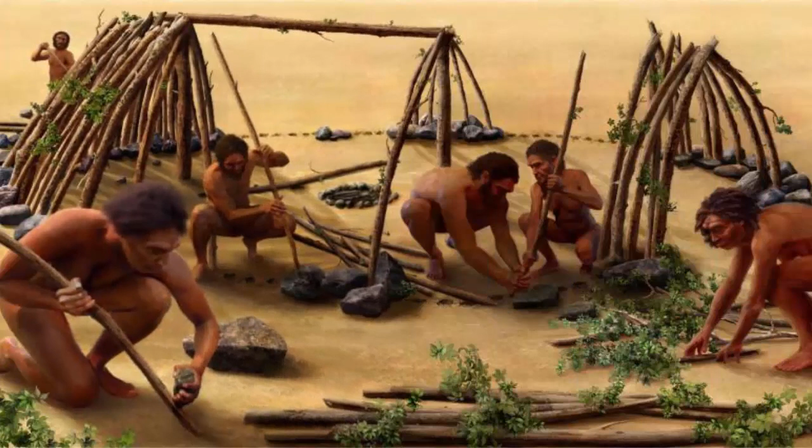Since their first attempts to improvise their shelter, humans started to change the face of this planet more and more rapidly, especially after every industrial revolution. First shelters made of branches, stone and animal skin combined with first indoor fires for heating and cooking evolved into today's high-tech buildings. Materials, first natural with minor adjustments, in time became more and more processed and artificial. That made constructions bigger, cheaper, and the time of their production decreased.

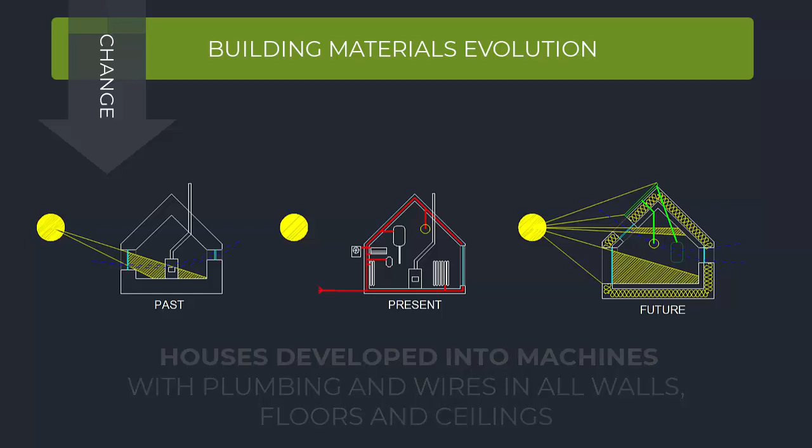From the shelter, houses developed into machines with plumbing and wires in all walls, floors, and ceilings. As technology grew, we also became more demanding towards our building's equipment. As we had more gadgets, we developed a habit to spend much more time indoors. That development has brought us many advantages, but if we look deeper, more disadvantages, especially when it comes to our health. Every next generation had more problems with respiratory system, skin, eyes. We became tired, exhausted, unhappy.

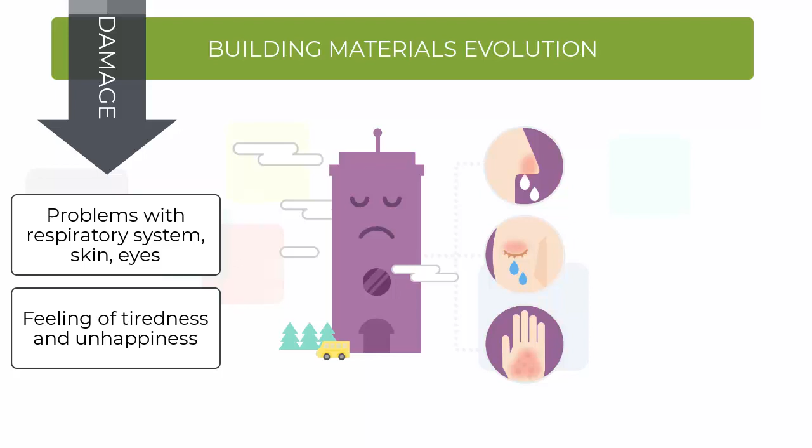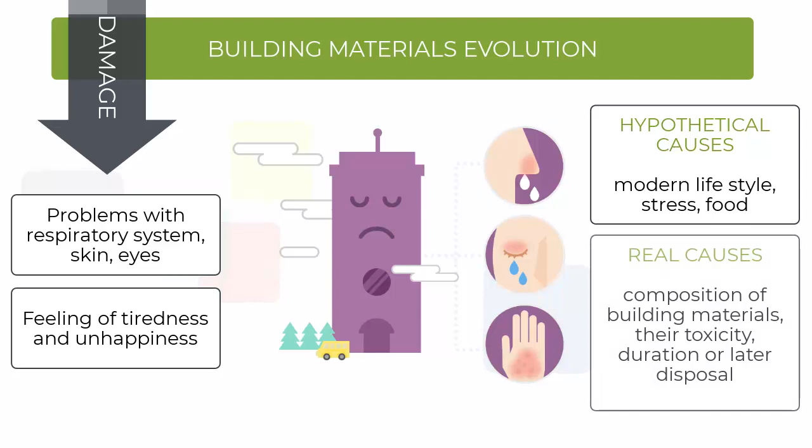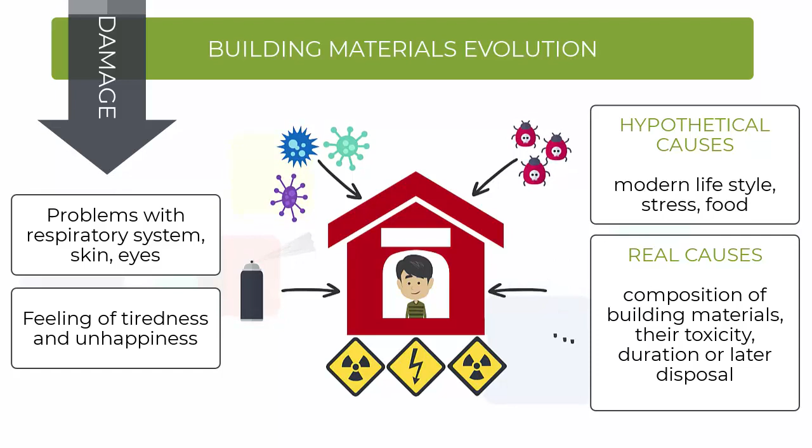We blamed modern lifestyle, stress, food, and other obvious factors. Rarely we thought about the composition of building materials, their toxicity, duration, or later disposal. We packed the houses not only with toxic artificial materials, but also sealed and air-tightened them so the oxygen level was dropping while dust and toxic vapor levels rose. More and more gadgets became wireless and screens started to surround us in every corner of our houses and offices.

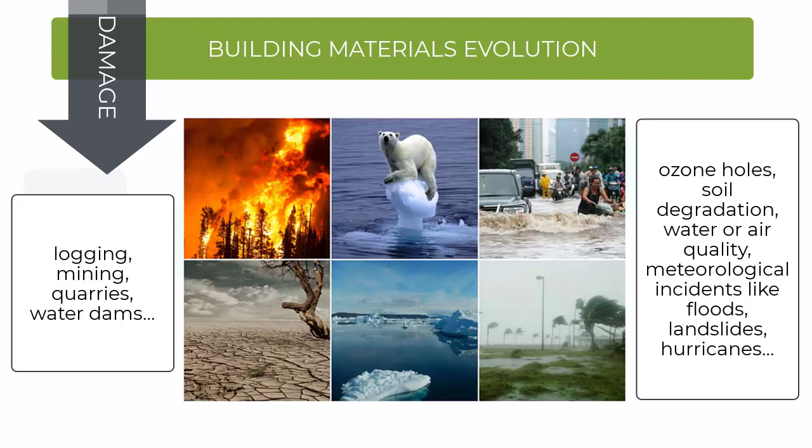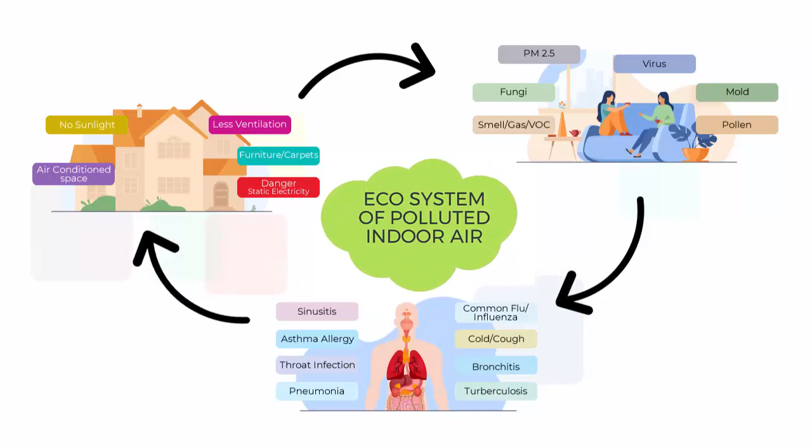The changes were even more visible on the surface of the planet. We started to scar the earth with logging, mining, quarries, water dams. Even worse situation is with invisible damages, ozone holes, soil degradation, water and air quality, meteorological incidents like floods, landslides, hurricanes. People in cities long ago started to notice that the outdoor air is polluted. So again, they found their salvation indoors, not realizing that an average household without air filters breathes the same air as outside, even enriched with toxins from their building materials, furniture, or other vapors.

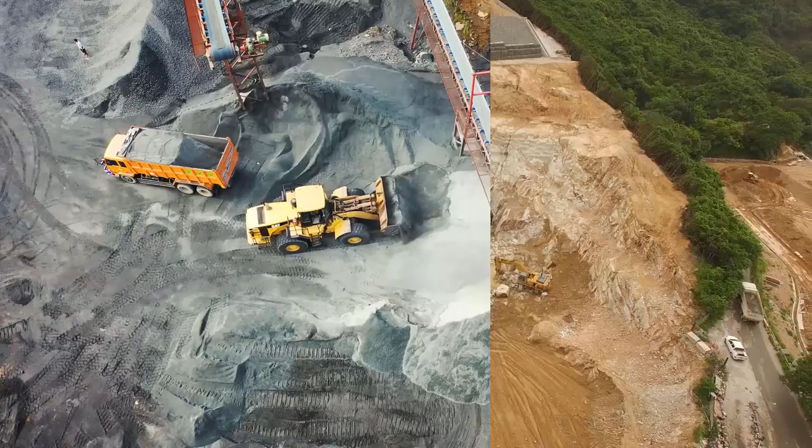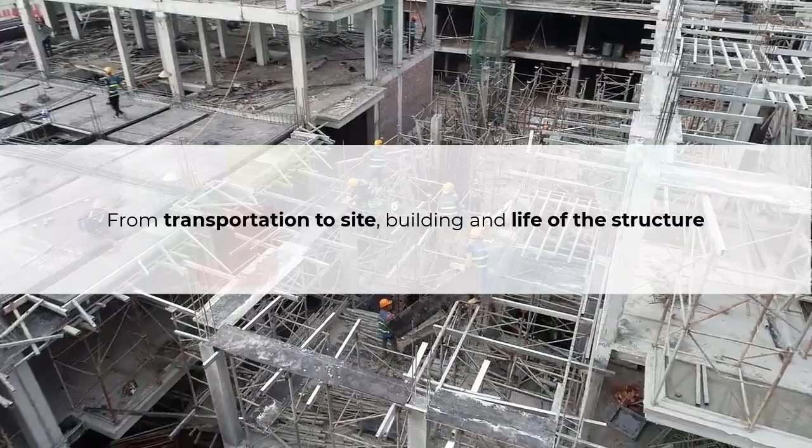How did we come to this? The discovery of fossil fuels made an enormous breakthrough, especially in the building industry. From transportation of raw material, its processing into building material, transportation to site, building and life of the structure, everything seemed like a fairy tale that will never end. Non-expensive, easy to build, use and maintain buildings, combined with, as we thought, everlasting fossil fuel reserves, made the building industry flourish and always ask for more.

We changed our request from modest to highest form of luxury. We wanted our indoor spaces to be an optimal temperature all year round, and it didn't matter how much it cost. Nevertheless, the consequences of this rapid growth of the building industry shortly led to the fact that it became the number one trigger of climate change.

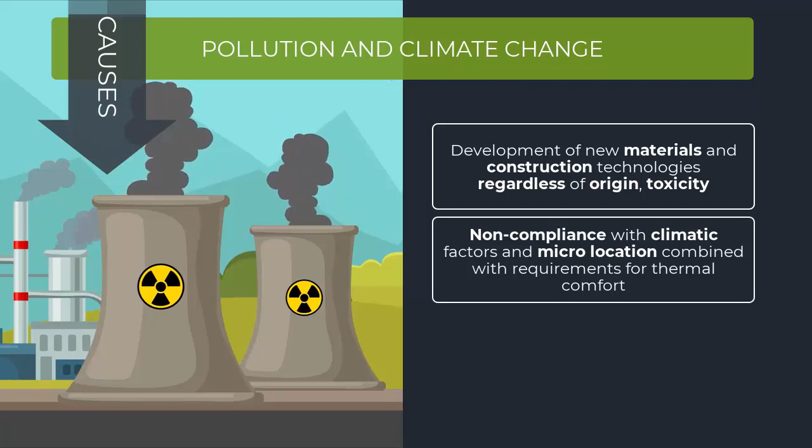What went wrong? These three factors are the most responsible. Development of new materials and construction technologies, regardless of their origin, composition, toxicity, or lifespan, in haste with lack of time for testing. Non-compliance with climatic factors and microlocation, combined with increased requirements for thermal comfort, and various heating systems in buildings and cheap fuel to compensate their shortcomings, regardless of their efficiency, sustainability, and source.

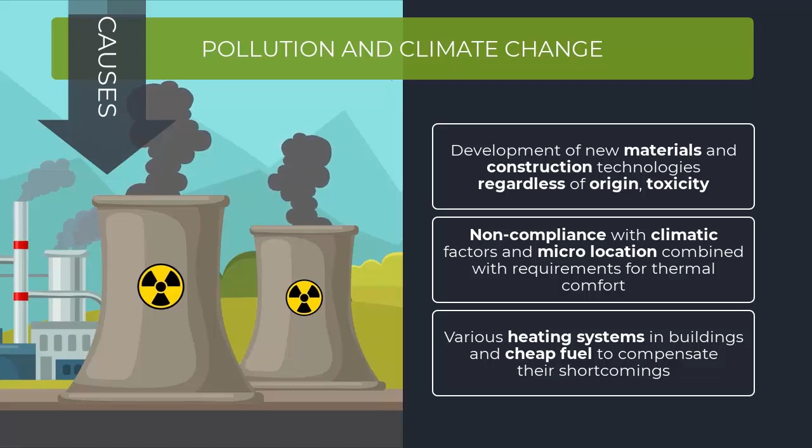Affordable fuel from, as we thought, endless resources allowed us to tuck ourselves in our cozy, unsustainable homes. But in real life, the situation was different. The oil crisis struck the entire world, made fuel less procurable and more expensive. Once warm and comfortable homes became cold and humid with visible marks of different unwanted processes within the structure.

All of this influenced the occurrence of construction and material damages, reduced vitality of the structures, health issues, financial expenses, and they resulted in development of regulations in the field of thermal, acoustic, and light comfort. The oil crises in 1973 and 1979 led to further development of the applied science named building physics.

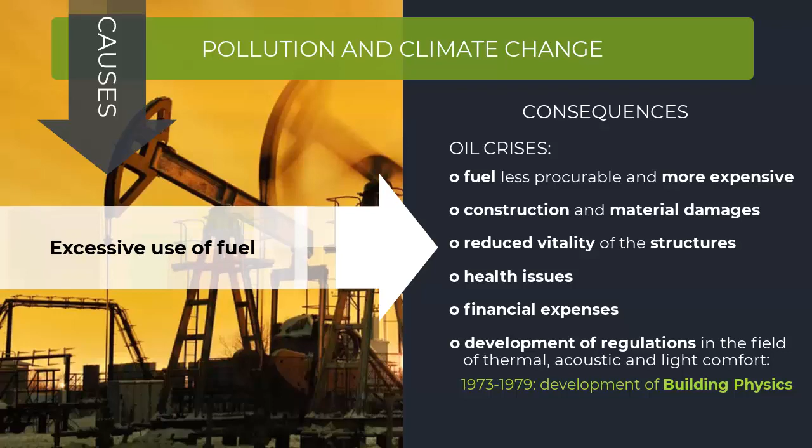According to Hens, building physics can be defined as the applied science that studies the hygrothermal, acoustical, and light-related properties of the building components. Understanding its principles is crucial for design of healthy and comfortable buildings, but also for their durability, energy efficiency, and affordability.

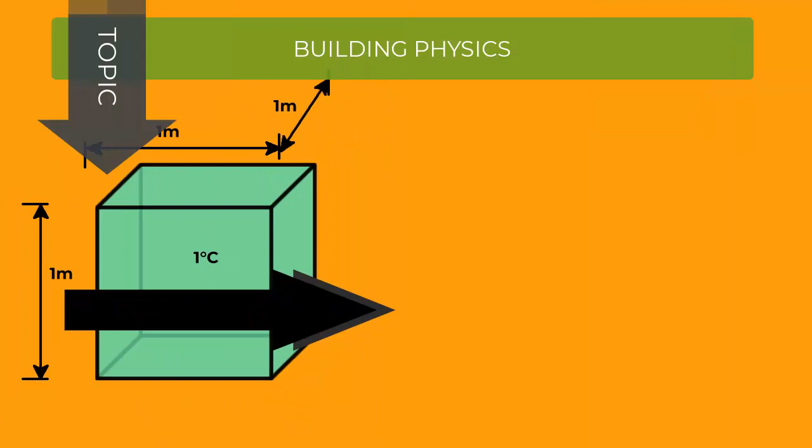The physical behavior of the building depends both on used materials and building technologies. To make it more simple, building physics is the science that speaks about how materialized buildings behave towards indoor space and environment and vice versa. In this module, we will speak only about hygrothermal properties.

Thermal conduction is the feature of every material. The symbol for heat conductivity is lambda and unit is watt per meter Kelvin. And we can define it as the amount of the heat that passes through a layer of material 1 meter thick in 1 second perpendicularly on a surface of 1 square meter if the difference in the temperatures of its border surfaces in stationary state is 1 Kelvin.

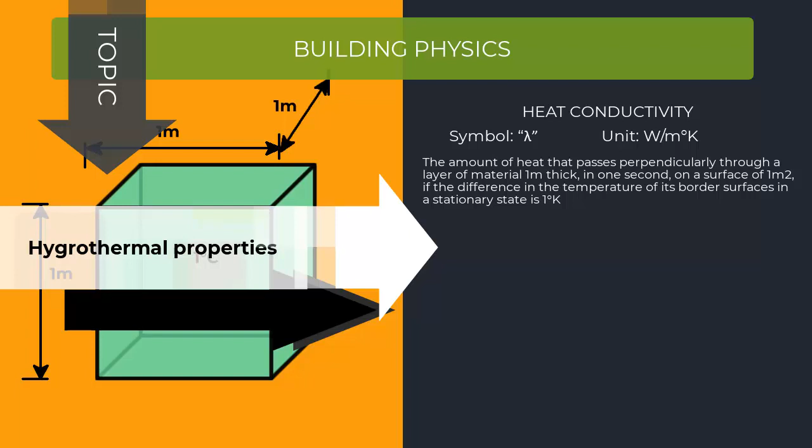On the other hand, in accordance with that, thermal transmittance U will be defined as property of a structure, and it tells us how much heat can be transferred from its one side to the other, and it depends on the thickness and lambda. It's expressed in watt per square meter Kelvin. The lower the lambda and U, the better. Heat transmission from one side to another is lower.

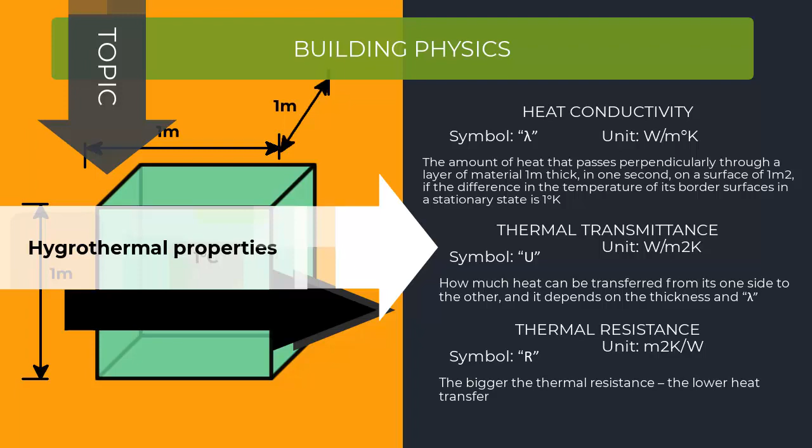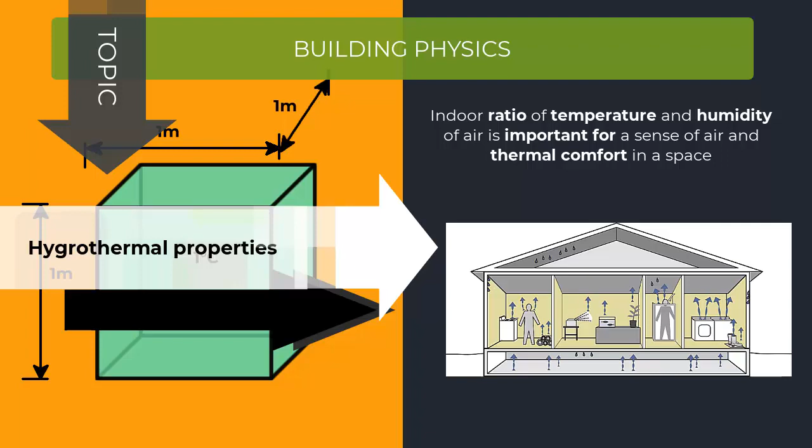In opposite to that, we have R value, thermal resistance of the structure, and its units are square meter Kelvin per watt. The bigger the thermal resistance, the lower the heat transfer. Staying indoors, we generate a lot of water in the air. Indoor ratio of temperature and humidity of air is important for sense of air and thermal comfort in space.

Standards define water vapor diffusion as water vapor flow through a partition element or material as a result of the difference in water vapor concentration, for example as a result of the difference in partial pressures in different spaces. The water vapor molecules will try to move from the side of higher concentration to the side of lower concentration until a balance is reached. We refer to this migratory movement as water vapor diffusion.

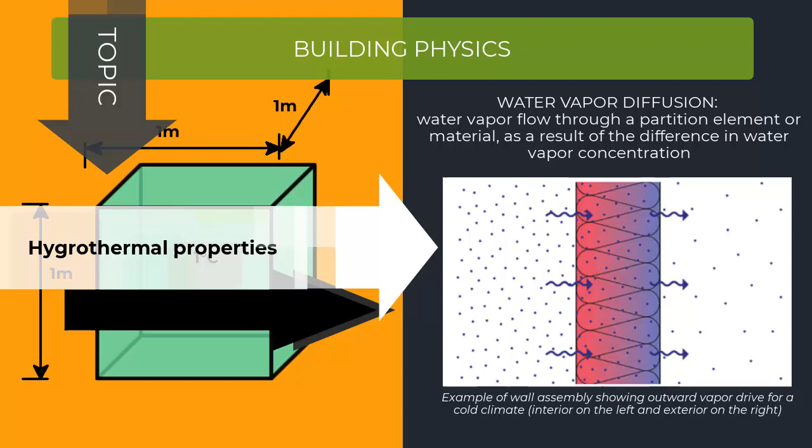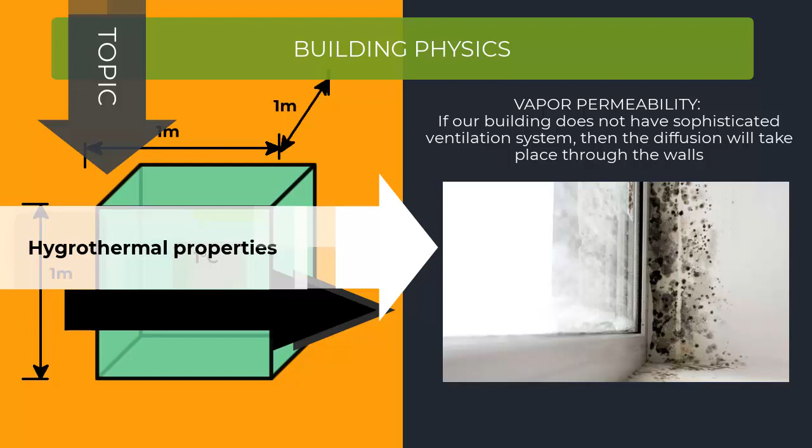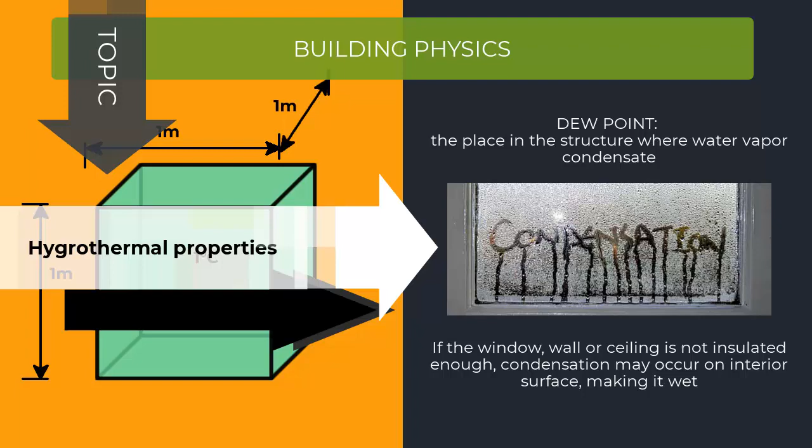If our building doesn't have a sophisticated ventilation system, then the diffusion will take place through the walls. That's called vapor permeability. Dew point is the place in structure where the water vapor condensates. If the window, wall, or ceiling is not insulated enough, condensation may occur on the interior surface, making it wet. When the humidity moves through the structure, dew point can occur inside the wall, ceiling, or roof, and in most cases it will damage the structure.

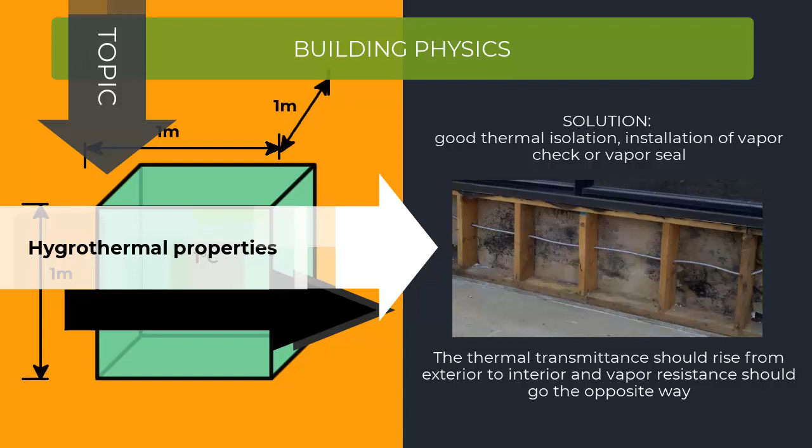This topic is wide and complex, but we can conclude that the solution lies in good thermal insulation, installation of vapor check or vapor seal, but first of all, excellent understanding of the topic. We can say that thermal transmittance should rise from exterior to interior, and vapor resistance should go the opposite way.

In order to answer contemporary needs for healthy and sustainable buildings, some important changes in building practices were introduced. Return to climate, bioclimatic construction principles, respect of the natural conditions of the site and its microlocation, smart and sustainable design, taking care of orientation and shape of the building and optimization of energy consumption,

a more caring attitude towards resources and exploring the possibilities of sustainable, bio-based or reused materials, and efficient and renewable energy sources for the entire process of building production, development of a system of regulations in the field of thermal protection, introduction of new standards and certifications like Passive House, LEED, BREEAM, and others. Consideration of carbon footprint and pollution, environmental impact of the entire lifespan of every used material and the building itself.

The future of the building industry is in well-planned and built buildings. Our health and the health of this planet depends on it. Modern approach to design of a building is holistic. Designers and engineers work together as a team. Instead of the previous practice to work in phases, this team is now solving the problems in real time with a lot of brainstorming, and the process becomes more efficient and easier. Sustainable and responsible building industry is a key to a healthy urban environment.